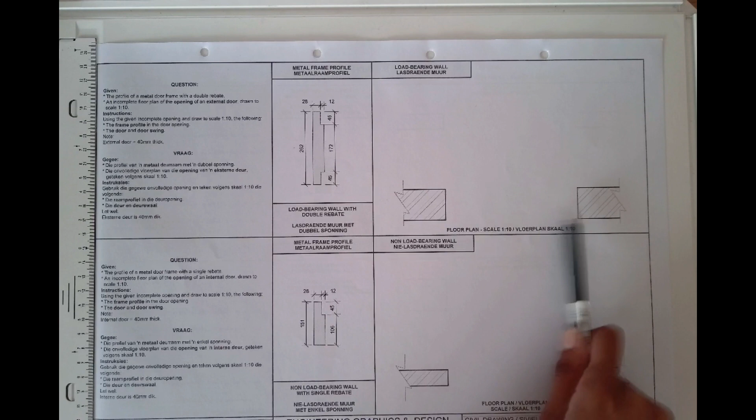So we need to draw the double rebate frame here, and once that is done we add the door swing and the door frame. We are told that the door is 40 millimeters, so I'm just going to write it here so that I don't forget. It's 40 millimeters - that is your door.

Now let's begin our drawing. I just want to zoom into the part that we will be doing today.

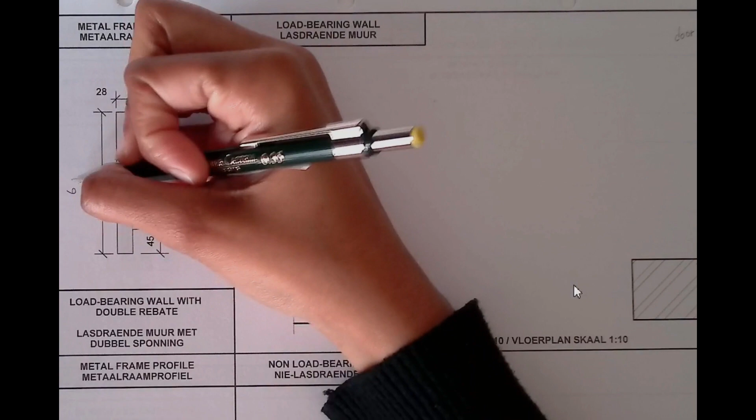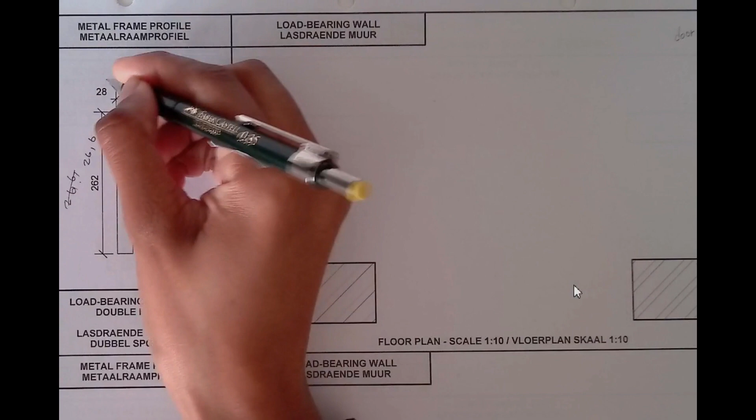First things first, ensure that you convert your dimensions according to the scale. Taking my calculator, 262 divided by 10 is 26.2. Then we are told this piece here is 28 divided by 10, which is 2.8. 12 divided by 10 is 1.2, 45 divided by 10 is 4.5. Those are our dimensions.

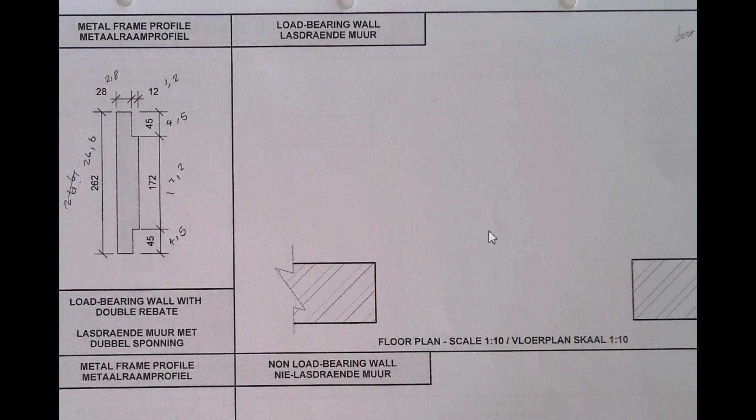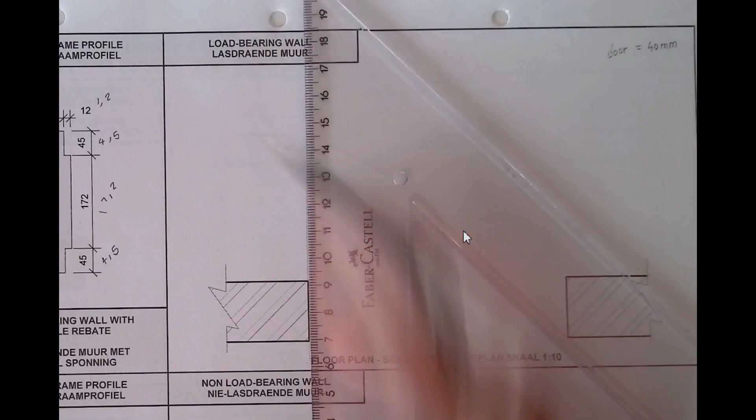Now that we know our dimensions, let's get to the drawing. First things first, remember you need to put this frame on both sides. Just ensure you read whether you are given a steel frame or a wooden frame, because sometimes the method for drawing will differ.

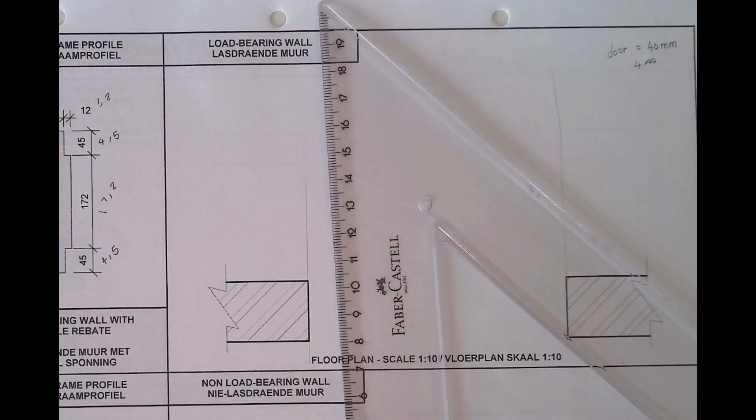Our door will then be 4 millimeters according to the scale. So we will now draw these two frames here. We need to measure 2.62... 26.2, so let us do that.

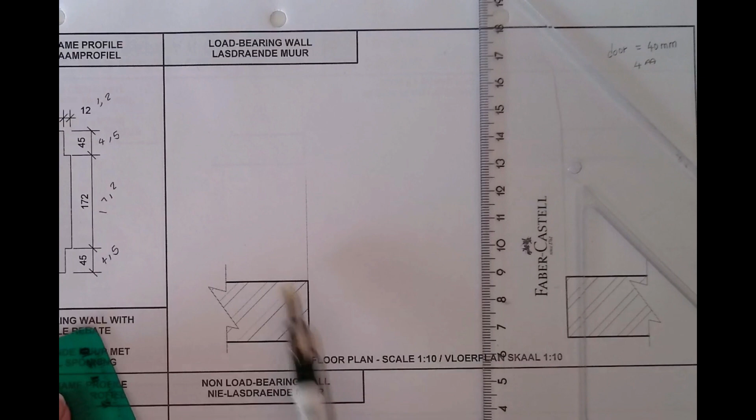But before we do that, let us see the thickness of our wall. We have our two walls here, let's see how thick they are: 0, 10, 20, 22. 22 divided by 2 gives 11. The reason I'm finding the middle point is because I want to ensure I measure my 26.2 from the correct point, so it's there.

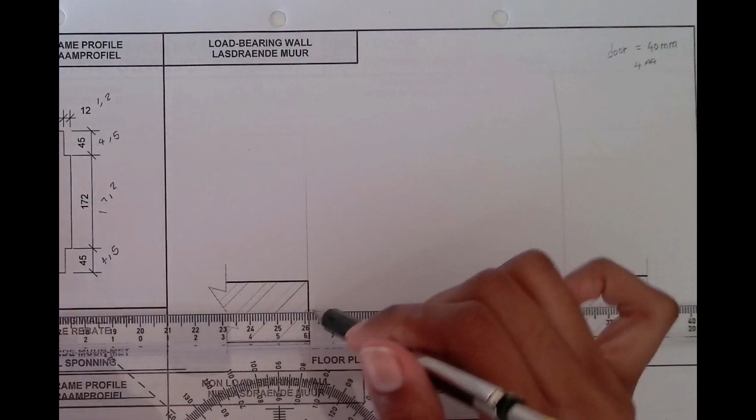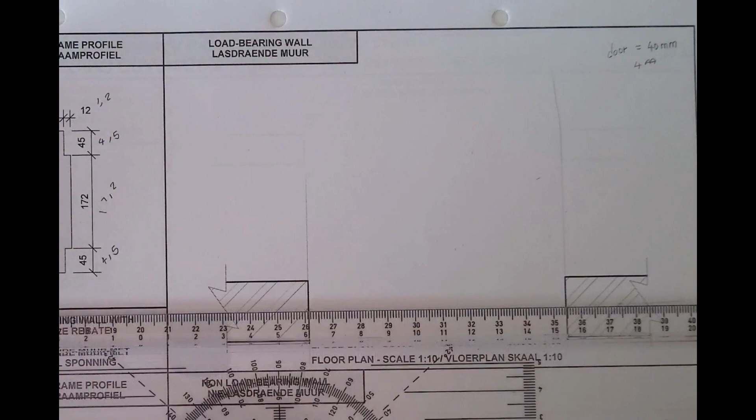Now that you have your point, you can just extend it. Let me just erase that, it's not looking neat at all. But you have your 26 here and you're extending it to the other side, so that's where you will be.

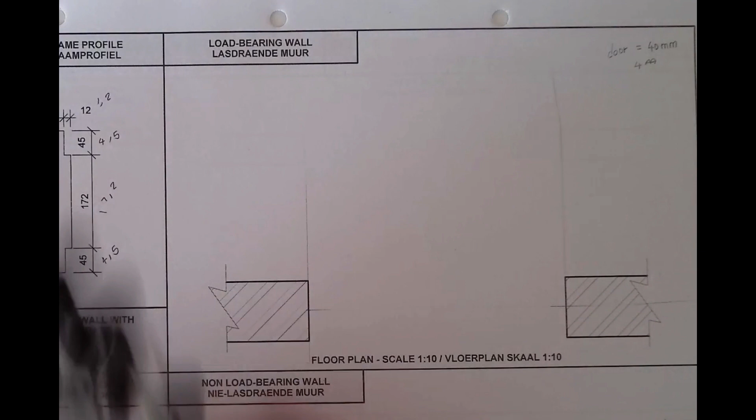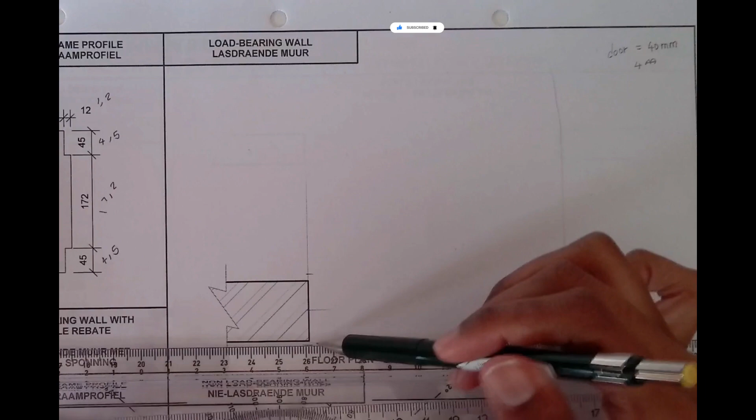Then 26.6 divided by 2 is 13.3. Come to your ruler: 11, 12, 13.3, and then you measure from where you have just marked the center, and that is how long your door frame is.

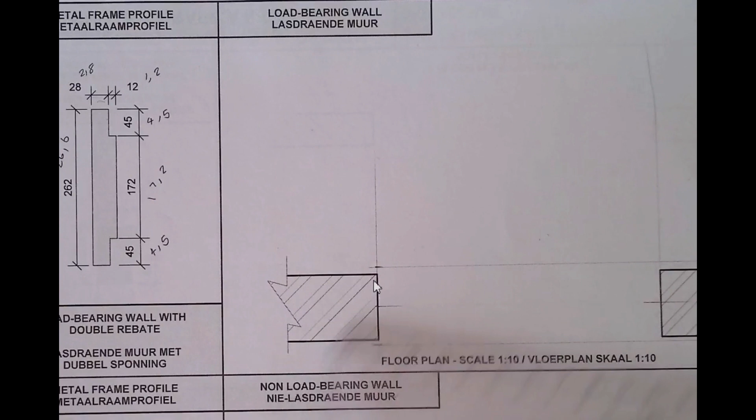Then we have the 2.8 here - this part is 2.8. I'm just going to measure 2.8: 0, 1, 2, just almost at 3. Then you measure, that's where you will be measuring 2.8, and then bring that down like that.

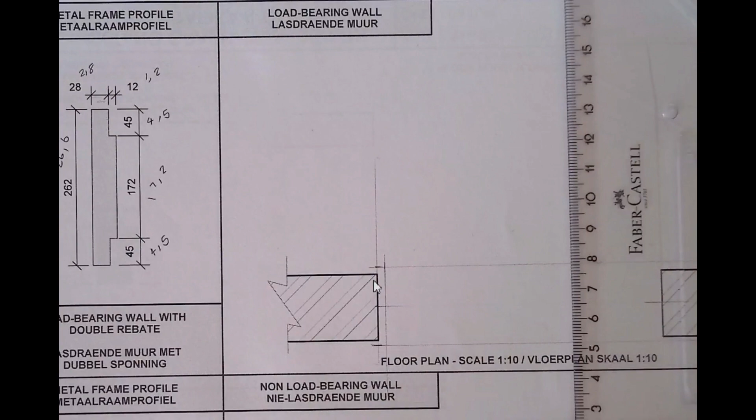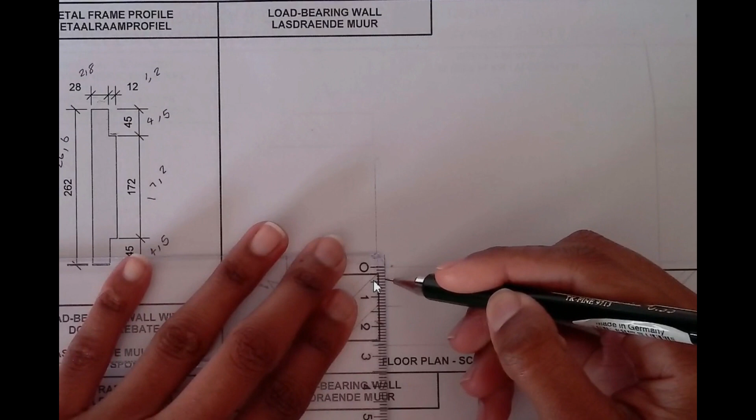Once the 2.8 is measured, now we need to measure this 1.2 here. So we need to measure the 4.5 first going down: 0, 1, 2, 3, 4, between 4 and 5, that's where you're going to have your 4.5. Then just to save time, do it for the other side as well - between 4 and 5, that's your 4.5.

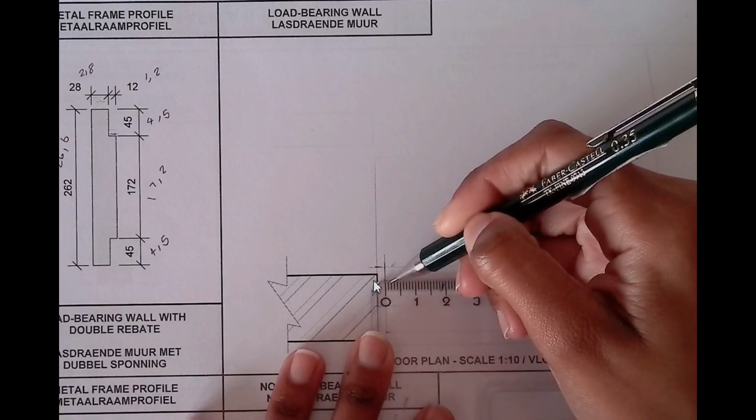And then we see these dimensions that are horizontal - those you can just slightly take to the other side, just to avoid remeasuring over and over. Once we are done with the 4.5 going down, we measure the 1.2 horizontally from where we just measured: 0, 1, just past 1 a little, and then you have your 1.2 there, and mark it.

So this is how your double frame rebate would look like. You're supposed to draw it using a B line.

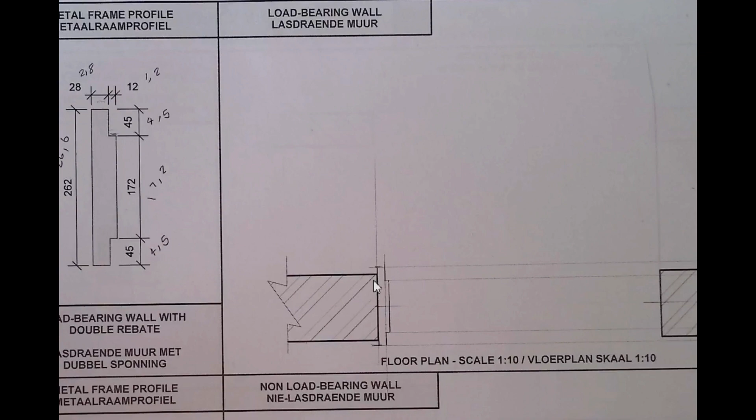I'm just going to outline that, and the 1.2 as well. It's too high for me, I will just sit back. Let me bring this closer to me like that, and bring my camera closer so I don't have to strain. Yes, this is so much better. Just hope I don't hit my camera.

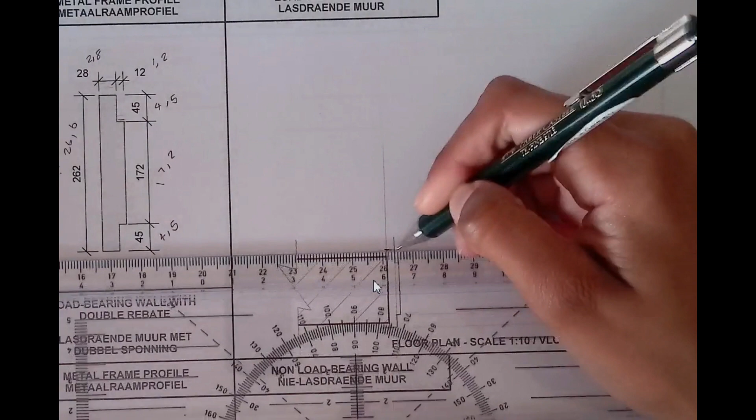And then just outline whatever you didn't outline. So this is how your frame would look like. We're just going to do the other side quickly.

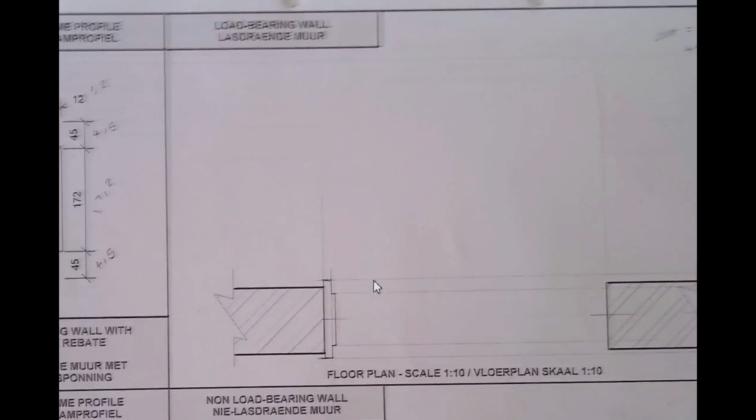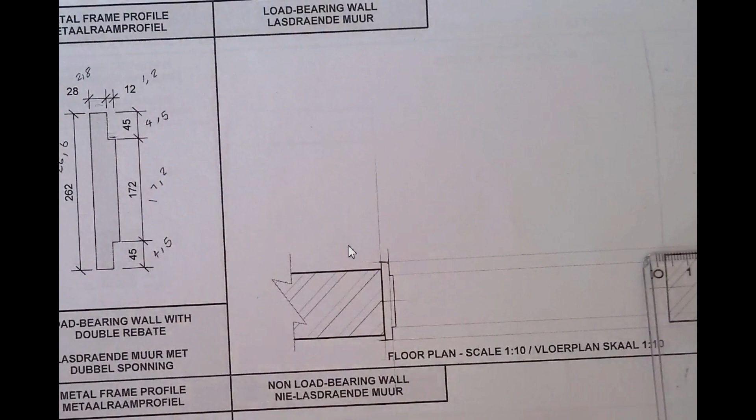So it's the 2.8 - now let's measure it, 2, just closer to 3, then that's where we will have the 2.8. And then bring it down.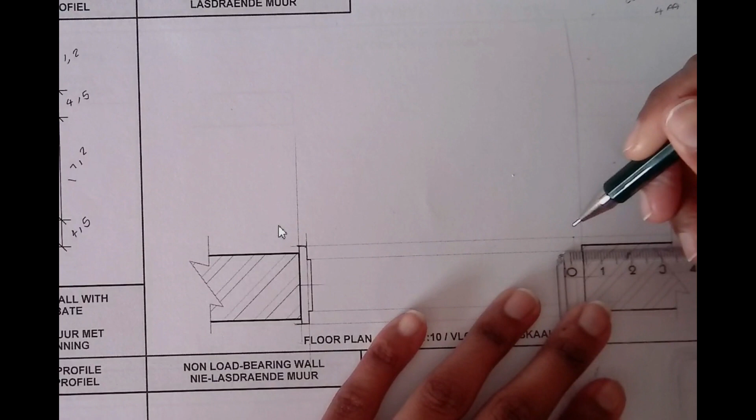From here we measure 1.2. You measure it just after passing 1 - just after, immediately, don't go too far. As long as you've passed 1, then you will have your 1.2.

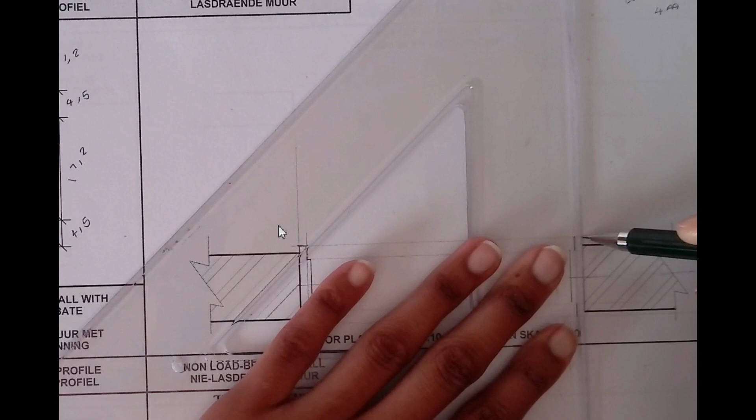Now I'm just outlining my points, or my lines.

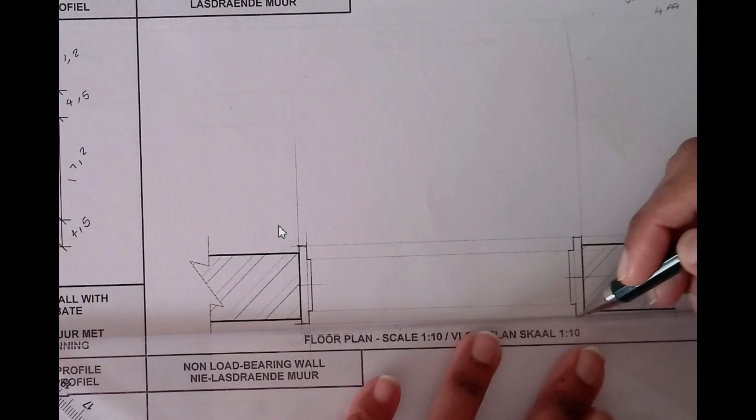So that is how our frame would look like. And remember, we were told that the door will be 40, the 40 that I had marked there.

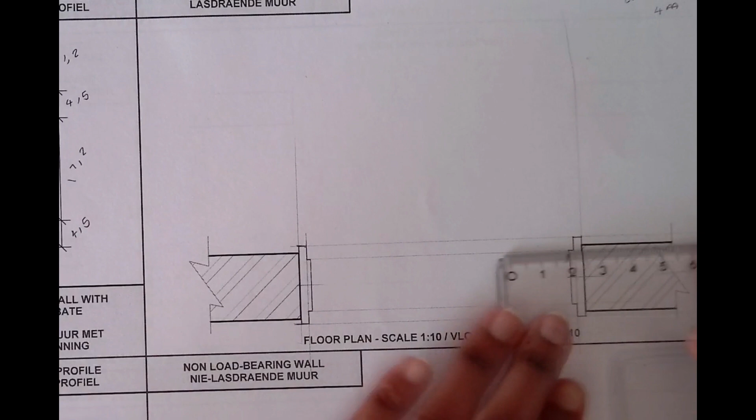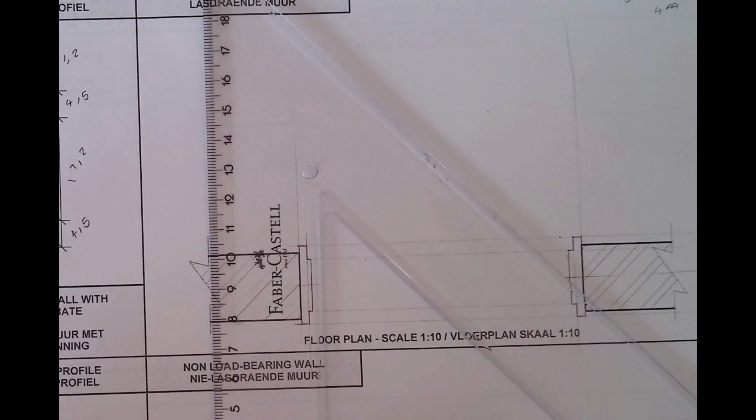Where our frame ends, we will then measure 4, we'll then measure 4, and then a vertical line.

Construction line first, then you're going to open your compass to the radius of the space that is there. So this space, then you have to draw an arc like that. See that arc? That will be your door opening.

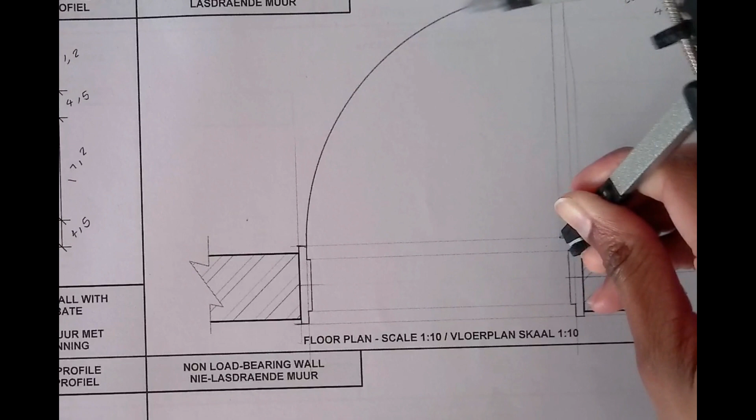So now let's just outline the door frame. Outline the door. This is our door.

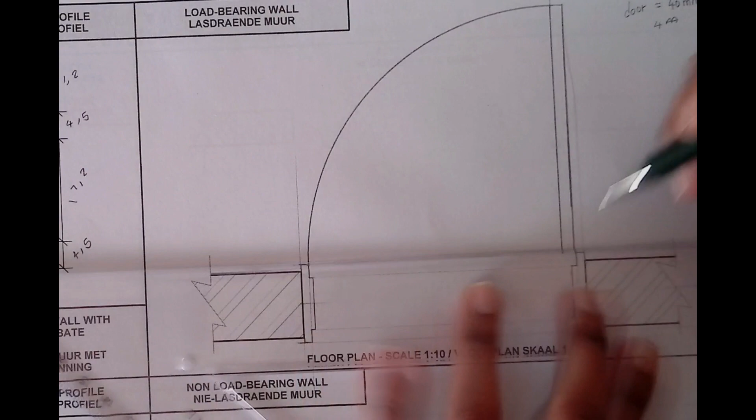Yes, this is the door. Just need to make sure that it's also straight there. And then we will now finish the length of our door, and close it off at the bottom like that.

So this is our door. This is how it will open, as we were told, and we were told that it is 40 millimeters thick, using the scale that gives us 4. So this is your double rebate frame profile. This is how you would draw it using scale 1:10.

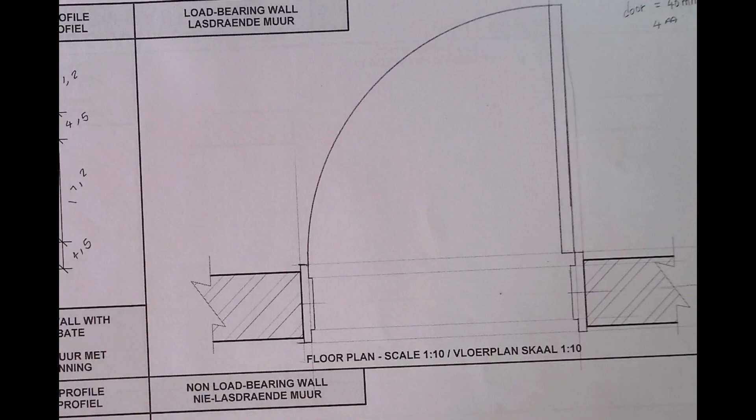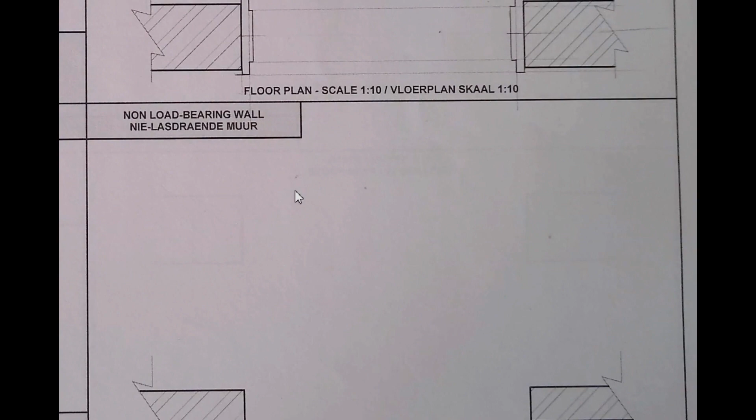Now for the internal door, just going to move my T-square back in my drawing board. Okay, so this is your single rebate for the internal door, so a non-load bearing wall, meaning that it's internal. So we will just do it quickly using the same steps that we used for the load bearing rebate.

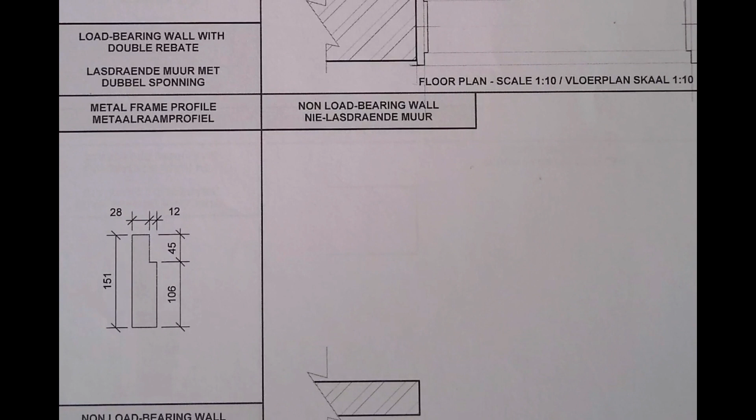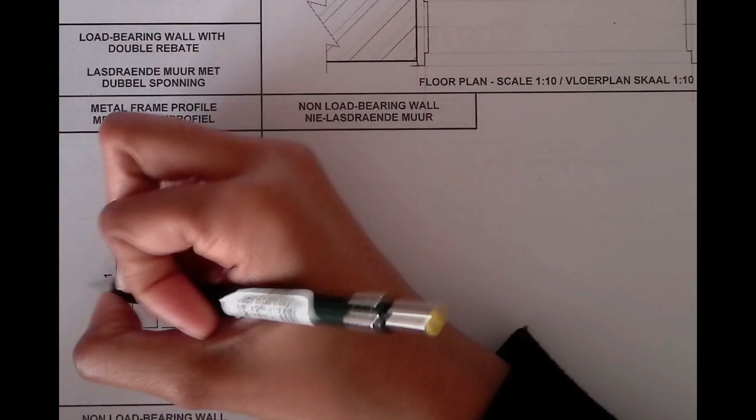First, have to ensure you convert your dimensions according to the given scale, which is 1:10. So 151 divided by 10 is 15.1, 2.8, 1.2, 4.5, 10.6. So those are your dimensions.

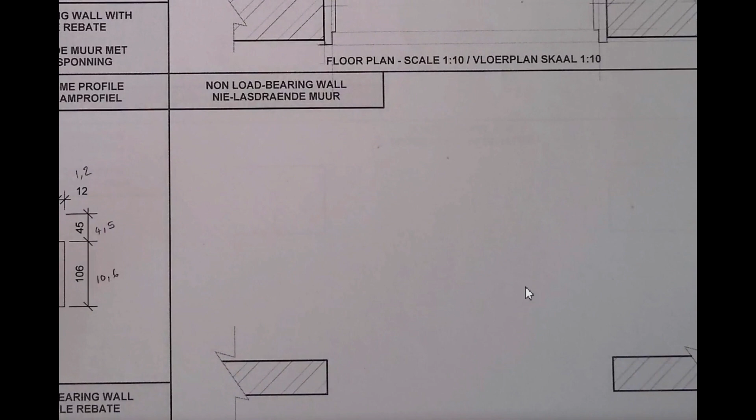And then now let's get to the drawing. I'm going to start with the left side of the wall. First things first, obviously you have to measure the thickness of the wall, which is 11. So 11 divided by 2 will give you 5.5. So between 5 and 6, that is where you will have your middle point.

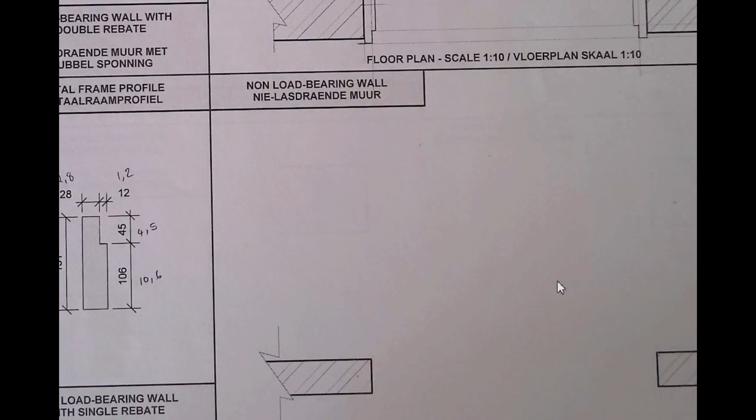From that middle point is where you will be measuring this length here, 15.1. So 15.1 divided by 2 gives you 7.55. So from each side you want to measure 7.55.

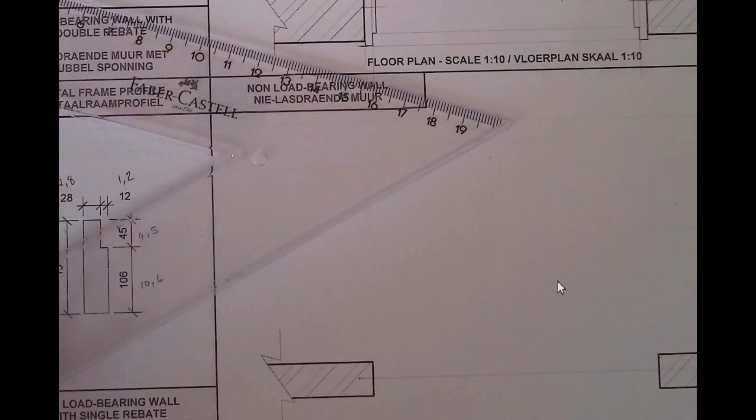I'm just going to extend it a little so that I can be able to mark my point. Then this one, extend it a little, also at the bottom, so that you can be able to mark the point. So it's 7.55.

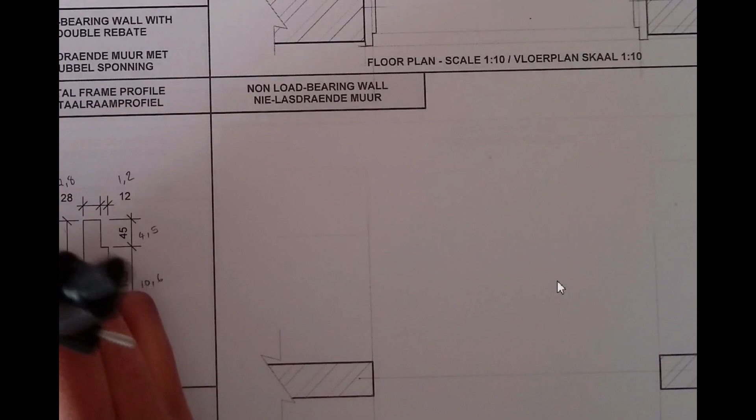So it's 0, and then you have 6, 7.5, just between 8 and 7. Then you mark it there. Then you'll be able to extend this point to the other side.

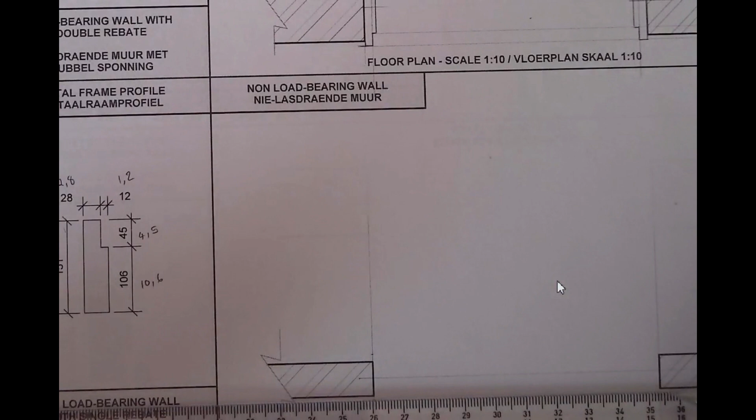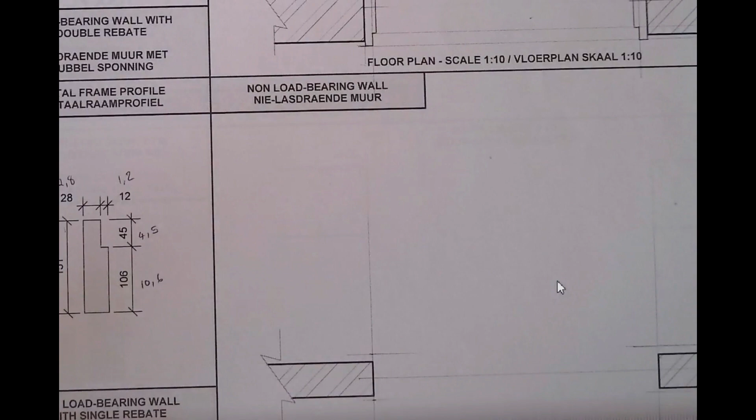And then this one as well. Just marked it, you can mark it there. So once that is marked, then we can continue. Then 2.8. So like I said, you count your 2 and then closer to 3, that's where you will stop. So this is 2, just closer to 3.

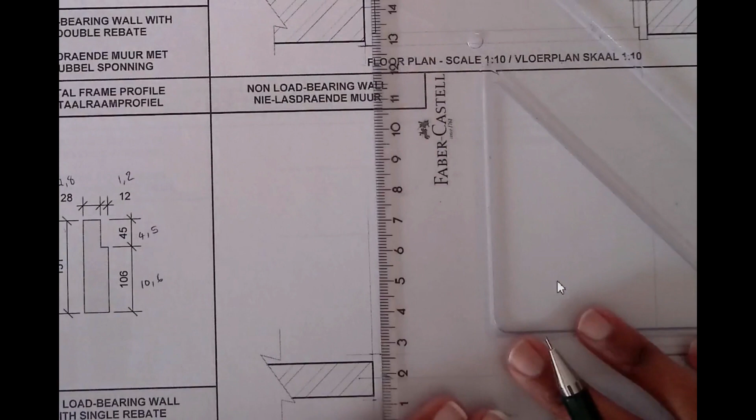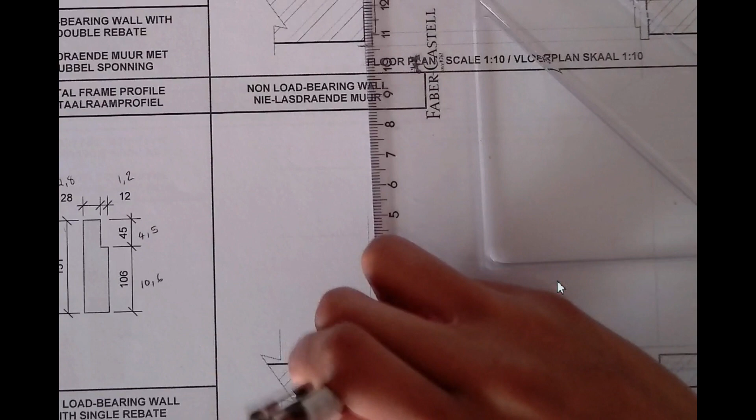Then you will just bring it down. And then measure your 4.5. So this is 5, and then let's just do 5. So 4.5 will be then, like I said, all your horizontal points you can just transfer them to the other side.

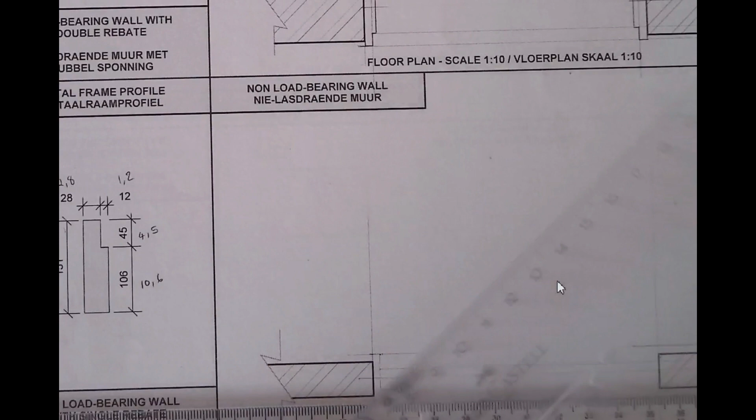And then 1.2 from the 4.5. So it's 1. As soon as you just pass 1 a little, that's where you will get your 0.2. You can even still project it from there where you had your 1.2.

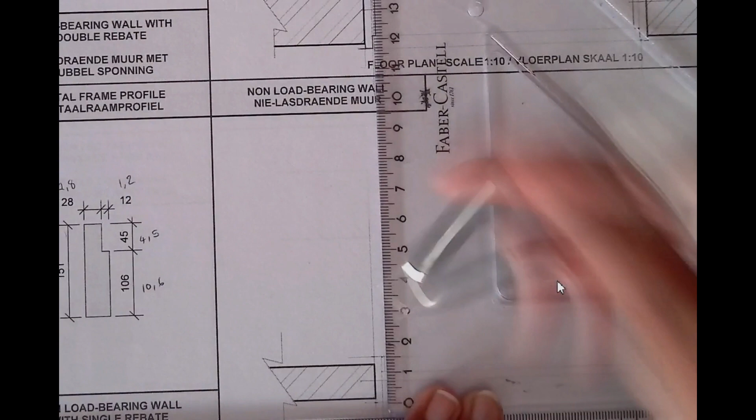So this was your 2.8, went 4.5 down, and then your 1.2. So you're going to bring that point down. So now let us outline it.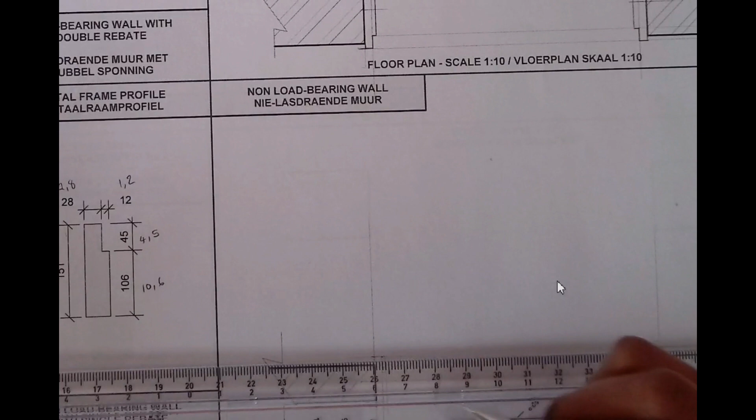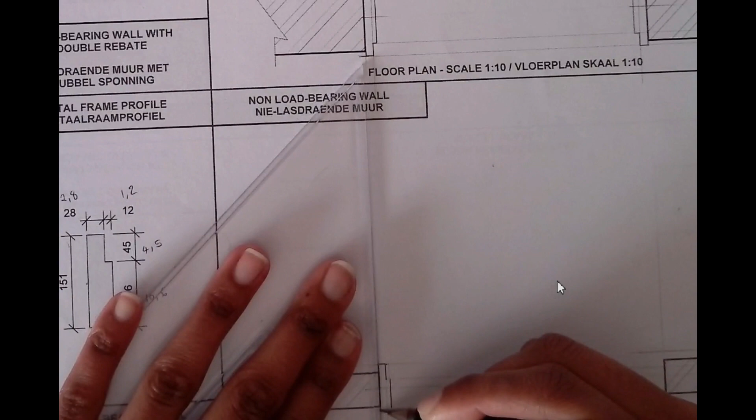Eight. Just remove this T-square, it is literally delaying me. So this is your single rebate profile for the non-load bearing wall.

So this is your left. Now we're going to do the right. I've already projected this line, that line, and that line there. Now I'm just left with the 2.8 and the 1.2. So I'm just going to put it here.

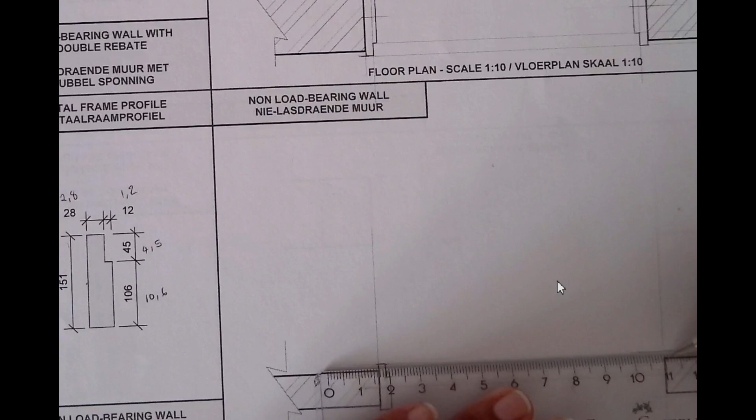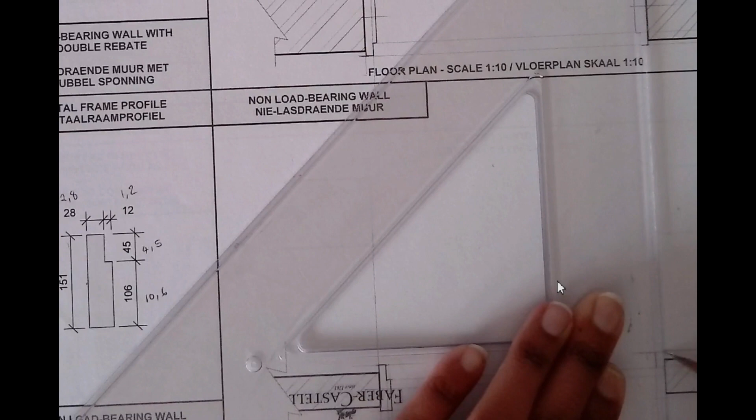2.8 first. 1, 2.8. And then 1.2. Zero, 1.2.

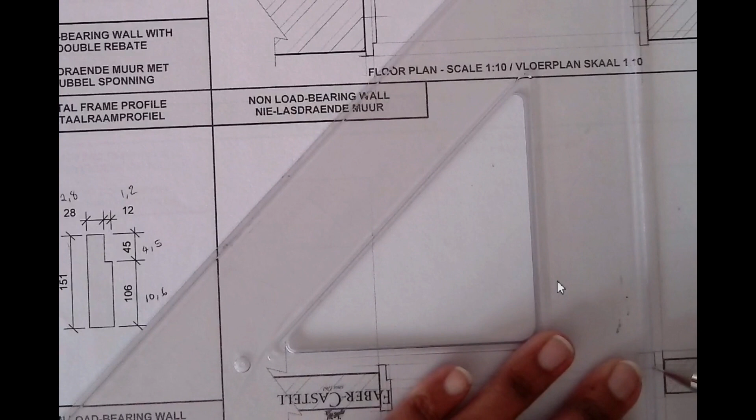Once that is done, it's just time to outline the rest. Outline here, outline that, and outline that. So you have your single rebate, and then from there, must draw your door.

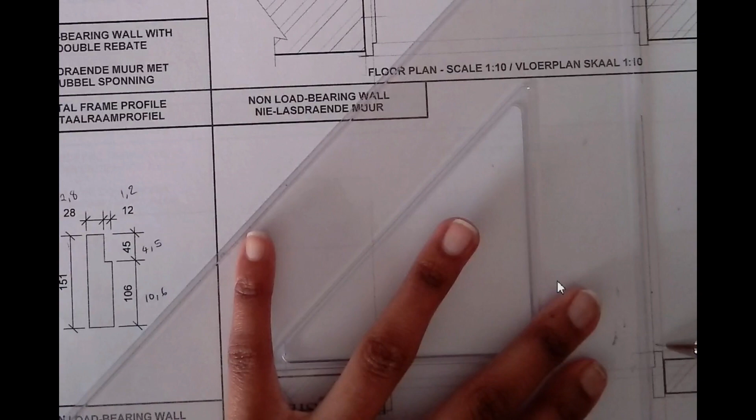Then 4 millimeters, as we are told that the door thickness is 4. So we come here and measure 4. And then go all the way up.

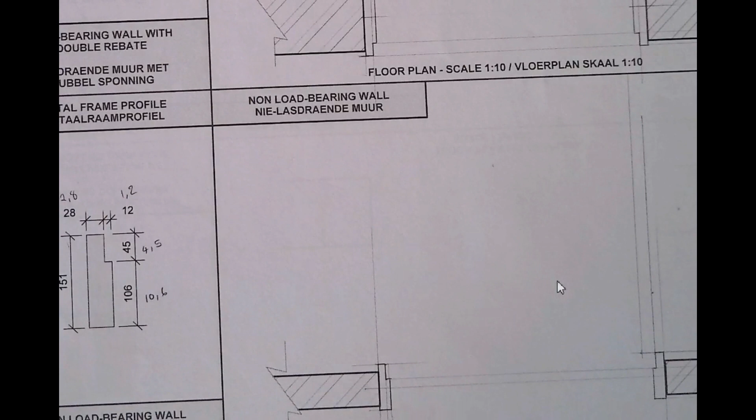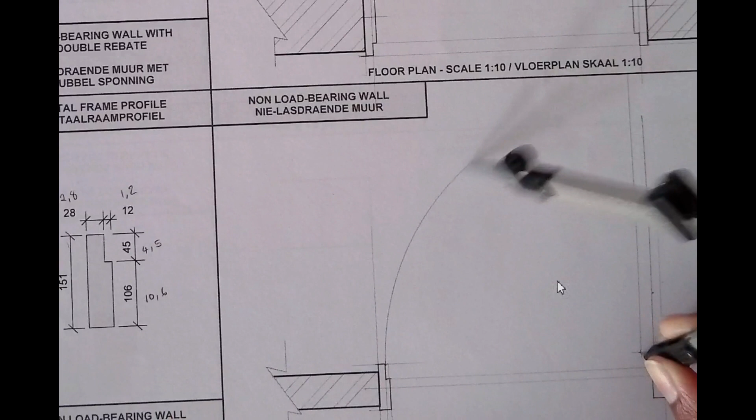Now to draw the door swing, put it here. Put the, then open it like that.

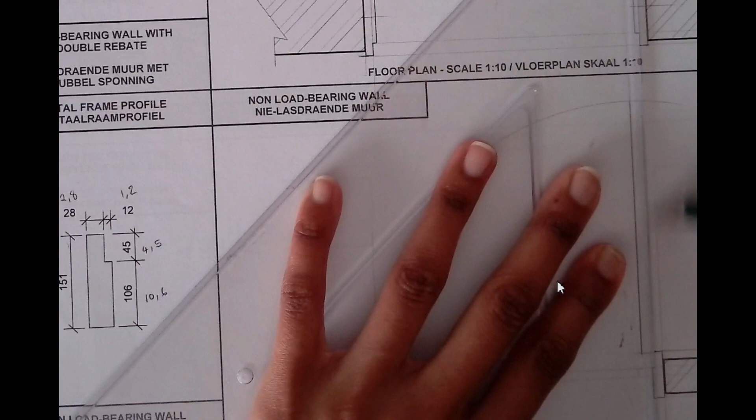I just need to extend this one here. So as you can see, then I'm able to just outline my door. Outline my door. Once that is done, then I can outline my swing as well.

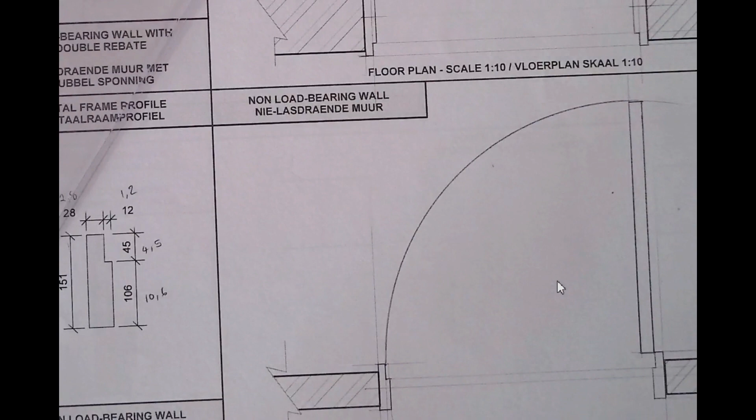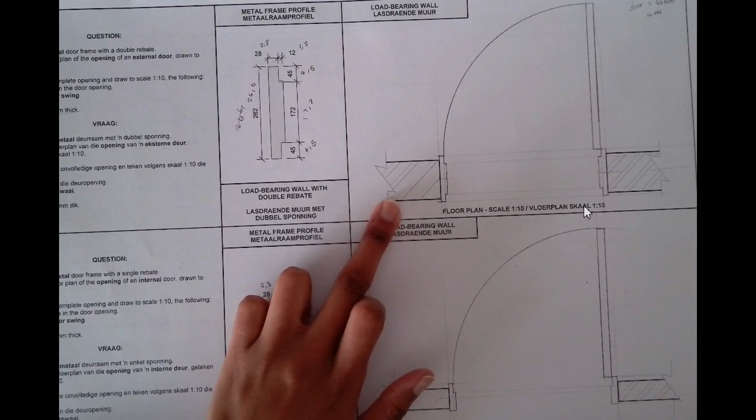So that is your internal and your external profiles. This one for the load bearing wall, it's a double rebate profile, and then this one for the internal wall, which is the non-load bearing wall, is just a single rebate, and you will see the different pictures as I have mentioned of double and single. I'm sure you have seen them, and I hope that this helped.

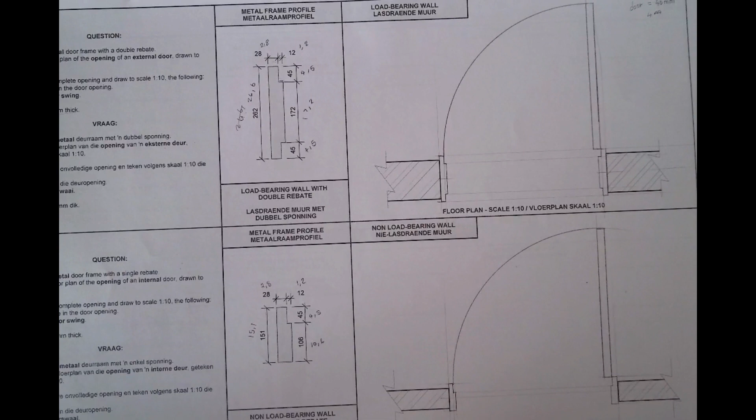With this information, you can then be able to draw the wooden profile, because you literally use the same concept. You ensure that your profile is always in the middle, so you always need to measure the center of your walls and then start from there to measure the length of it. So with a wooden one, it might be smaller, like inside the wall, but it's still the same principle.